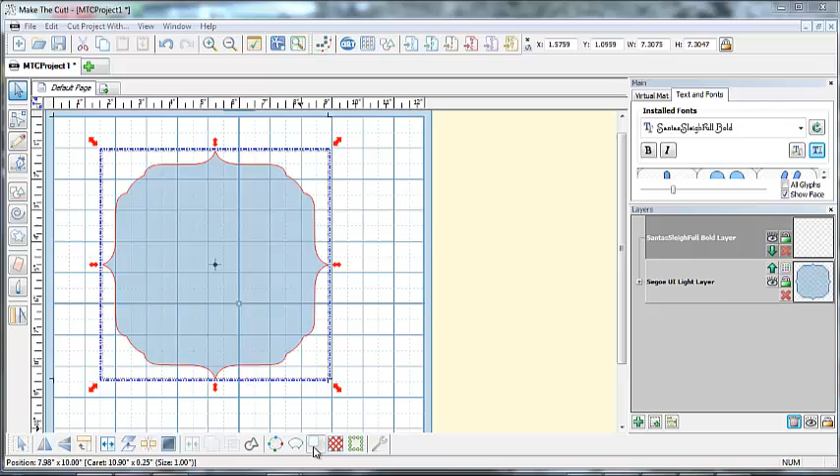So first off, we'll try a shadow with that. We'll try an inward shadow of -5, accept, just to see what an inward shadow of -5 would do for the little one. It doesn't look too bad, so we'll bring that in and do a +5 on the bigger one.

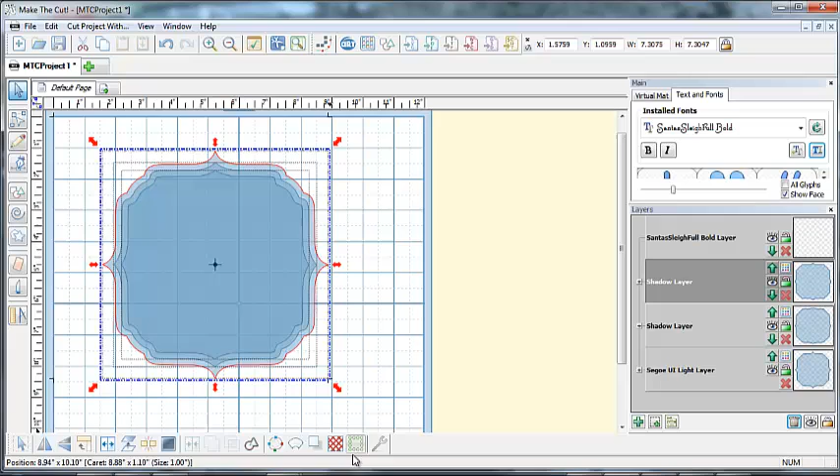You usually can work out which one's better to use for your project. As you'll see, I've now made 4. Accept. I think I don't like that last one, so I'll take that out.

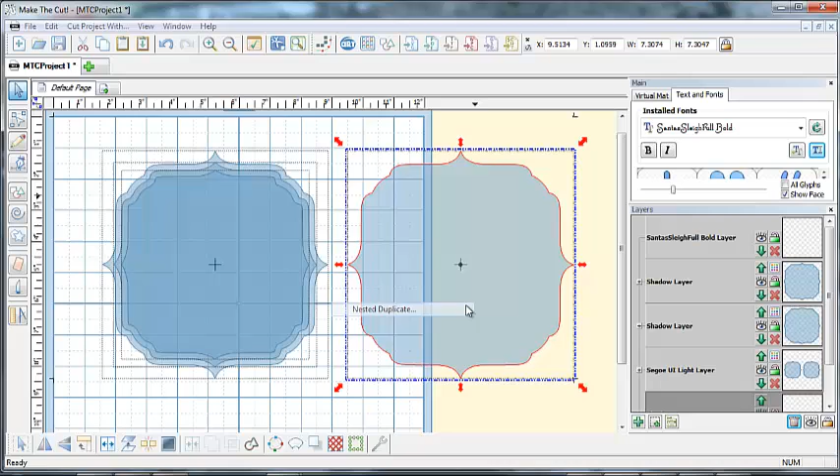We'll go cut. While I'm here, I'll just do a copy of this one, the bigger one, and do a nested duplicate to see how different that one would be. And we'll do 4 and preview that.

Oh, I don't mind the look of that. We'll take it up to, say, 5. Preview that, so it generates that. I don't mind that one better.

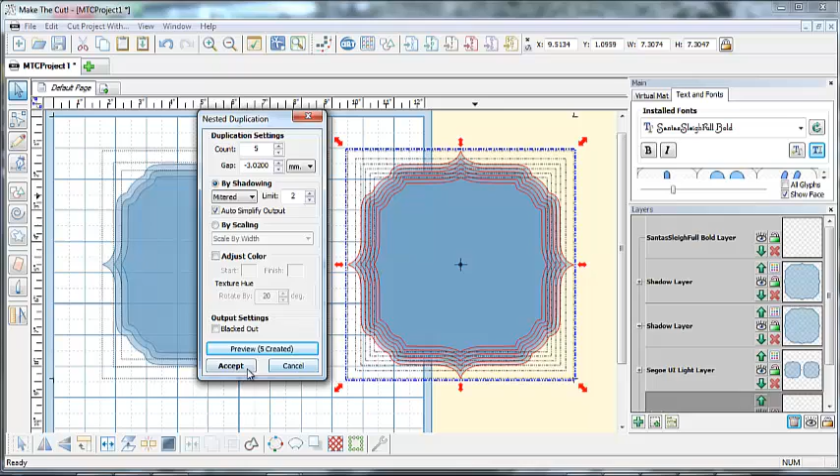Okay, we'll accept that. You'll see that the difference between this second one and this one is slightly different, or it might be just my eyes. So what I might do is throw away that one.

Cut. And use this one. This one, no, this one - and hold the shift key down and select the outer one. I'm going to do a copy of them.

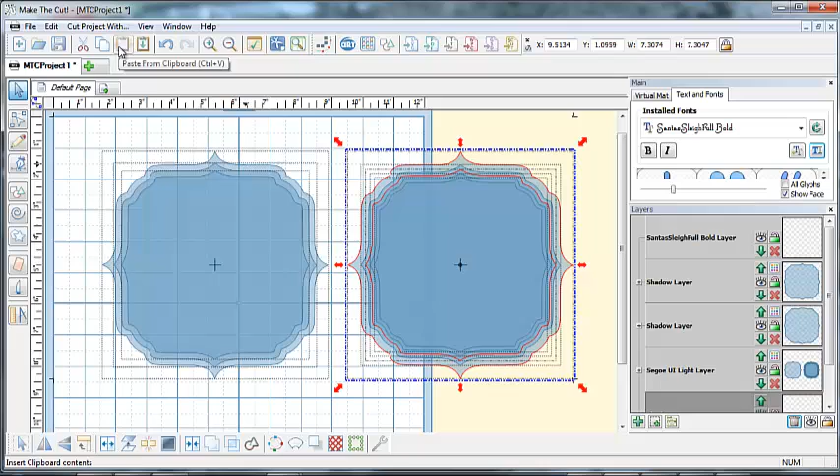Copy. Now I go over to Pop-Up Card Studio, and I've got a project. What I want to bring in is a project of 5 inches by 5 inches.

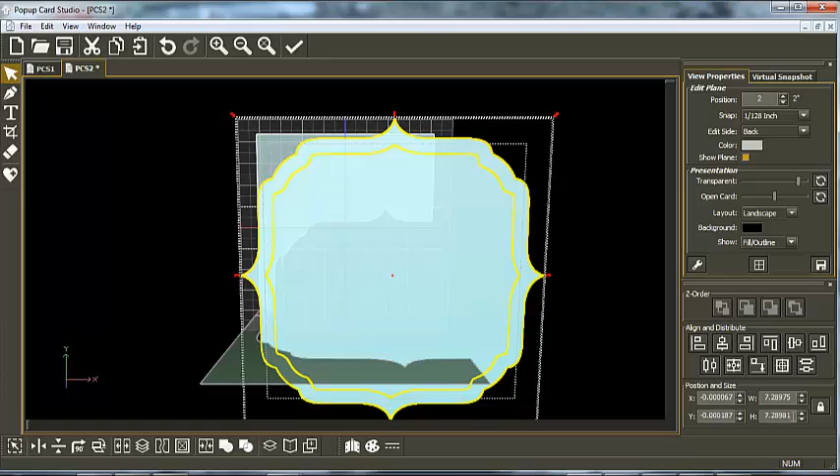Working the same way as I did my inside-outside cards, I bring this to a plane of 2. I go paste the project I just did, and I want that at 4 inches. So with the lock selected, I go 4 inches, enter, and I want that on a y-axis of 3.

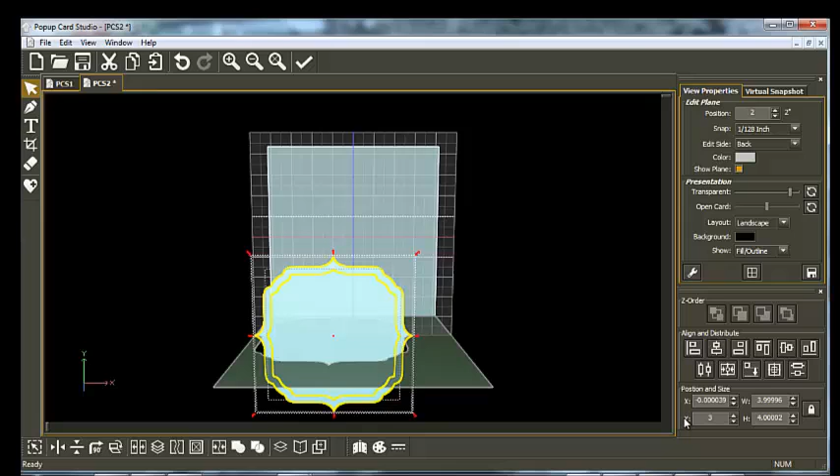And in the center, so I can go to the center there. So now what we have is the inside-outside card. I'm just thinking I might rotate that to make a different one again. Okay, we'll rotate that and see what it looks like.

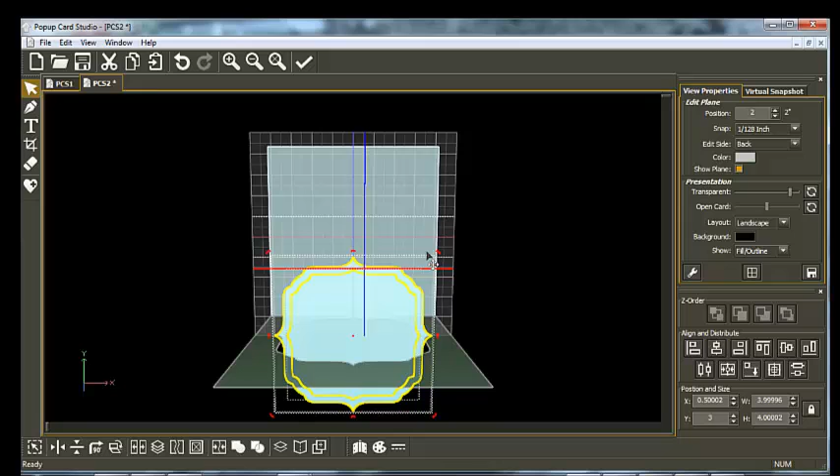Holding the control key down, I'm going to rotate it 45 degrees, and I'm going to see what that looks like. But I now want it back to 4 inches high. Oh, I do like that. So I just rotated it 45 degrees and I've got a different look again.

And I've got it back on the 3 axis and made it 4 inches high. So we shall continue an inside-outside card so it can be made into a pop-up display card.

And pop-up display cards are when you have one pop-up where it's folded here out, and this one gets connected to another bracket behind this line here and folded back there. I will just bring over this.

This is a folded display card, and we'll just show you. I did these in a webinar about a year or so ago. When did I do them? Back in 2012, 2 years ago.

And what you do is you have your pop-up inside-outside card here. You join another card here, but these two pop-ups, the inside-outside part, get joined with the tab at the back here, and it ends up being a display card like this.

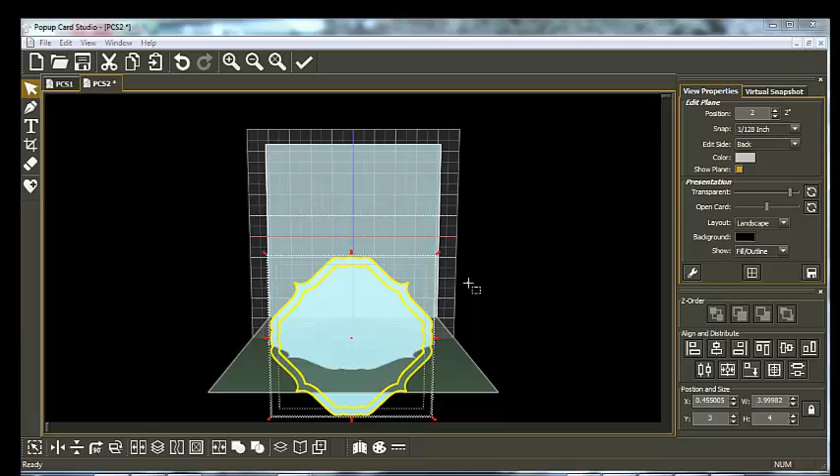So we'll continue. Now I'm doing this on the fly because I never thought I was going to use this bracket and do it like this with this shape. So we'll get back to here. I went off on a sidetrack there.

Now what I want to do is bring in a small 2-point rectangle about this width, and we'll put that in the center, and I want to put it on a plane of 3.

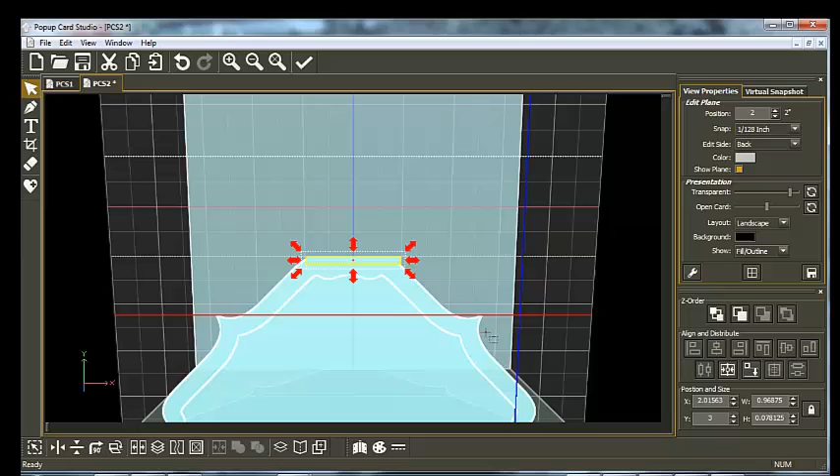I'm doing this for a reason. I've just sort of noticed, I don't think now my bracket is in the center.

It's not. So now I reselect that top little one I made and put that in the center, and a bracket and a y-axis of 3.

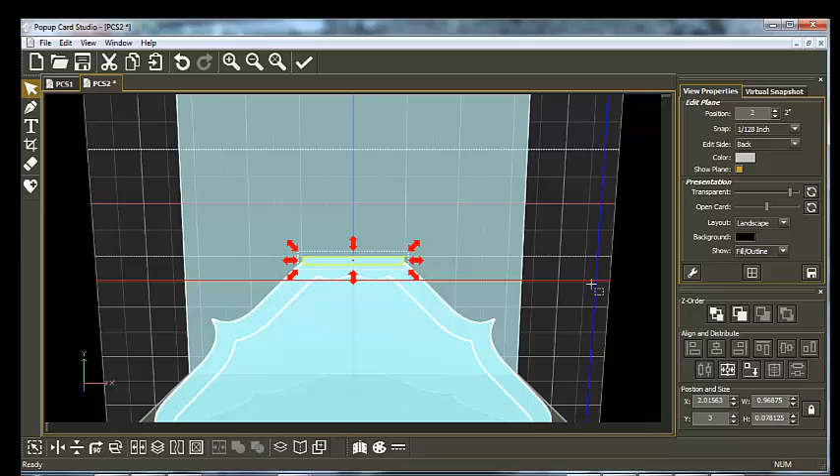So now what I'm doing, instead of chopping the top of the bracket, I'm adding a solid line onto it. So I'm going to fuse and weld these shortly. First off, I'm going to take a copy of them. Get copy.

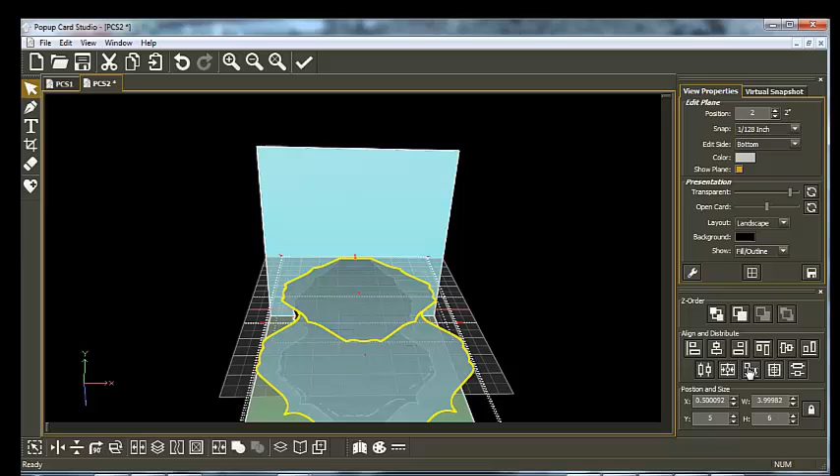Copy. And I go to the top plane. I go paste in place. Flip. And then I lower it down. Ooh! But it didn't lower. Right.

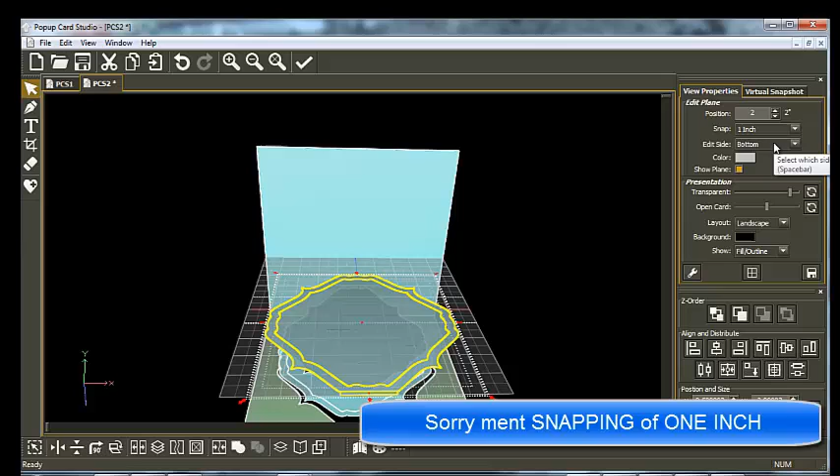What I'm going to do is turn this up to a snap of 1 inch, and I'm going to use the arrow keys to lower it, and hopefully, because I turned it on 1 inch, it's ended up on the 2-inch mark here, 3-inch mark here, and it has here. So this is now on a 3-inch plane.

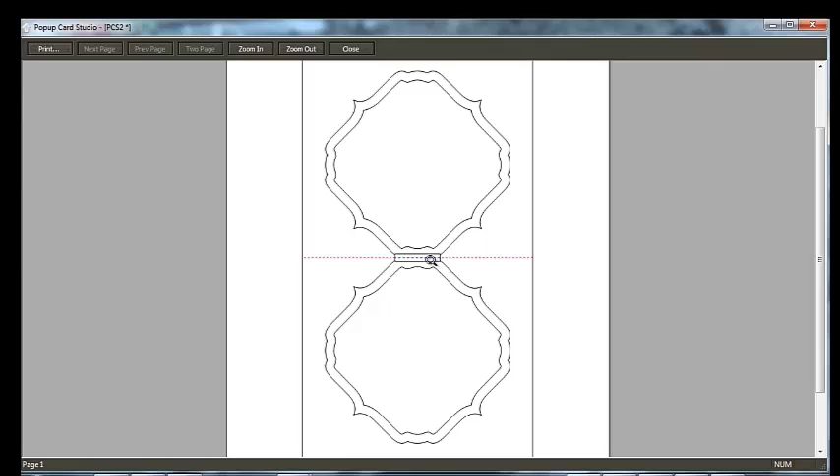So if I was to print preview this, the center of that block I made should be now dotted, and it is. So it's a score line.

Now that's one reason I did not weld them first. If I had to tweak it, I could weld it afterwards. So now what I do is deselect the inner one of these bracket shapes, and I do a weld.

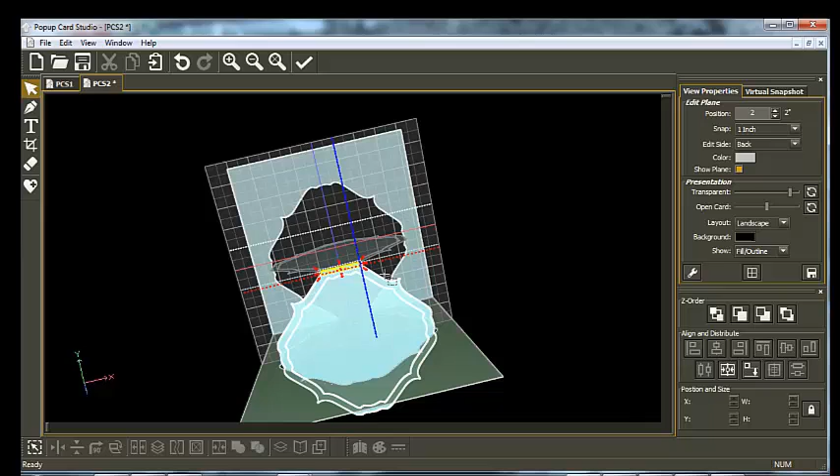I go back to this bottom one, holding the D key, going here, but I want to select that little one, and holding the shift key down, select the outer big one and do a weld of that.

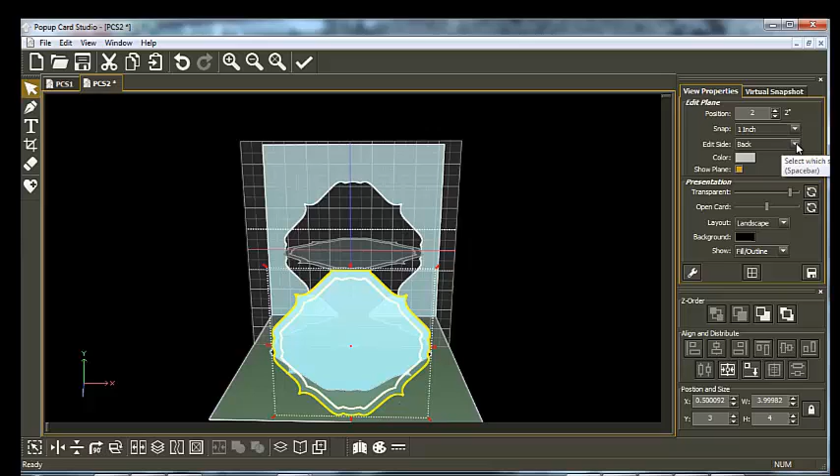Now what I do is I do a copy of that big one, copy, and I do a bottom plane of 0, and I do paste, and I lower that to the middle plane, and while I'm at it, I'll also lower it all the way down.

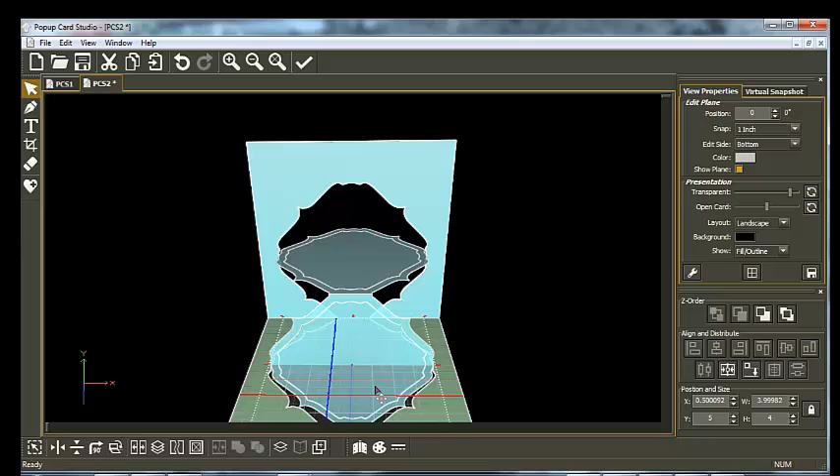So now that is now cutting out of the bottom of the card. But what we want is we want it to cut out. If I zoom this up here, whoops, and zoom it around.

What I want is I don't want this to be all the way back to the back. I'm going to come in, crop from the back, and I'm going to come, see how that's turned. Oh, I have to stop that for a second.

Well, right, we've lowered it to the bottom. I want to do a half inch. Now I do a crop, so I go from way back from the back. That's on where they both join, but now I want to come one more half inch forward and go chop.

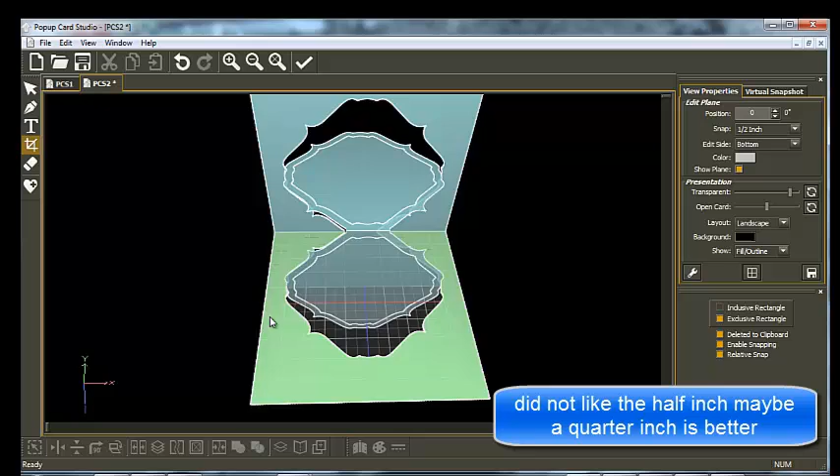So now what we have is that one that's on the bottom is only chopped, only going to have this half inch from that actual piece. There is a reason for this, but I'm going to go back because I'm not happy with that.

No, I'm going to make it a quarter inch from there. So I go here and one out and go crop. Okay, there is a reason for this, but now we're going to come back to that. So it's a quarter inch.

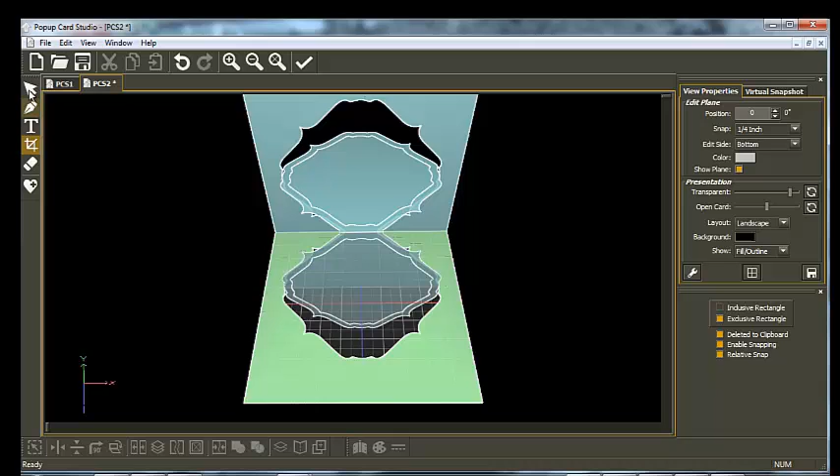This shape here is only a quarter inch back from the actual inside-outside card. Now hold the D key down and we go to this shape.

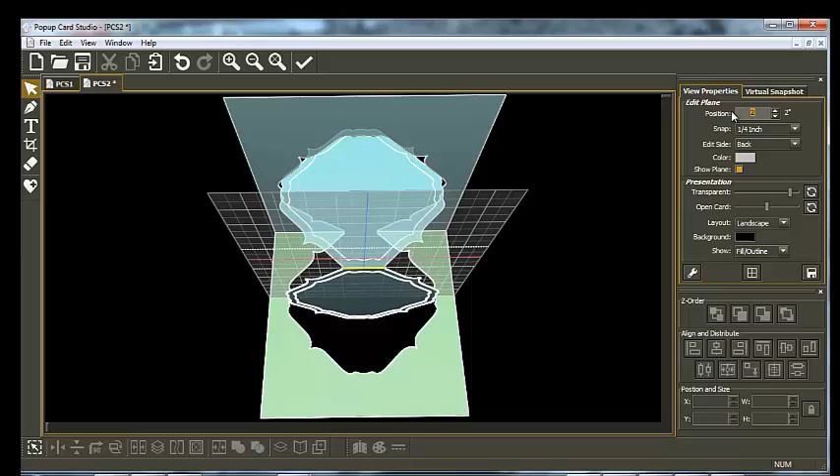We do a copy of that. We go to back plane of 0. And just pan up so we can see what we're doing. And we go paste. And we lower that to the lowermost plane. And then we lower it to the bottom, z-order.

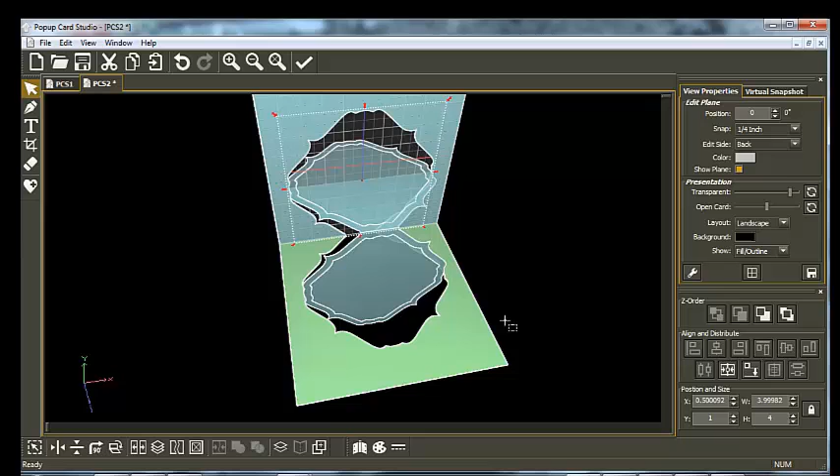Now we're going to crop that the same as we did the last one. We go from under it. And see how the dotted lines? We go one more up. So now we've just chopped this one.

So that is that big, from a quarter inch from this card. You'll understand what I'm doing shortly. Now we go back to this one.

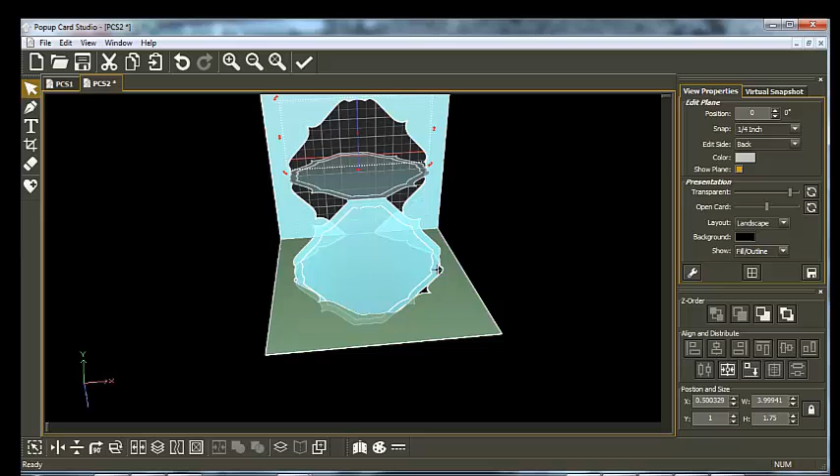We select this inner one and go cut to clipboard. Then we go to crop, and make sure deleted to clipboard is turned off, so it's no longer yellowed out.

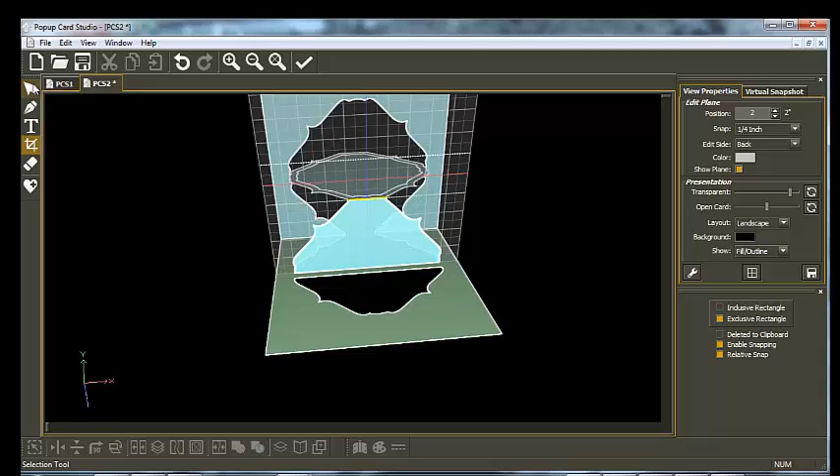We go from under here and up until the line turns dotted. Then we go back to the select tool and paste in place what we put in the clipboard. We select both and do a weld. Now we have our inside-outside card with one bit extra here.

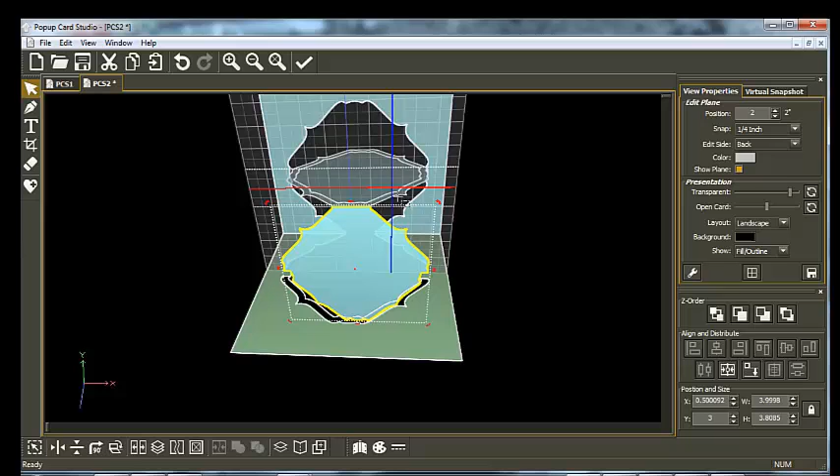And we're going to do the same with the top. Those who have watched my inside-outside pop-up card demonstration will have seen all this before. If you haven't, pop on after the video and have a look.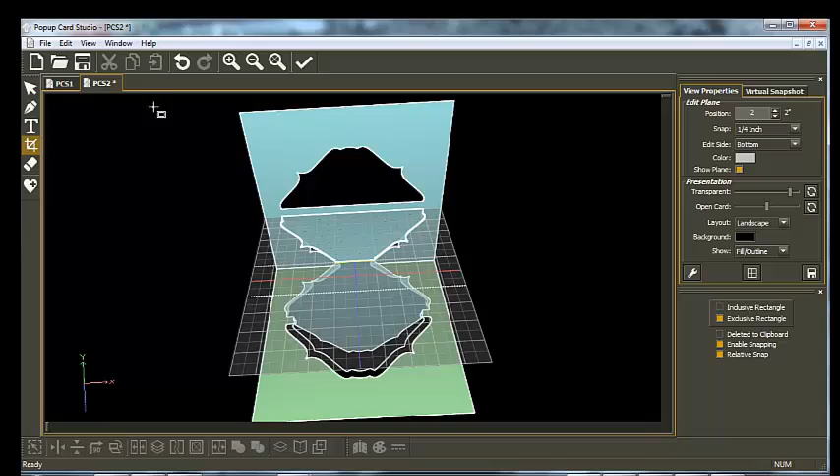You select the middle one, cut to clipboard. Bring the crop key, make sure it's not deleting to clipboard. Go from way behind up to when it turns dotted and clip. Then go back to the select tool, paste in place, select both, and do a weld.

Now we'll go to print preview. This is going to be folded backwards, the middle bit folded forwards, and it's going to be folded on these lines, so this back bit falls out. But you've also got this part here.

Now that part here, I can give you a tab so you can join to the next one along in your display card.

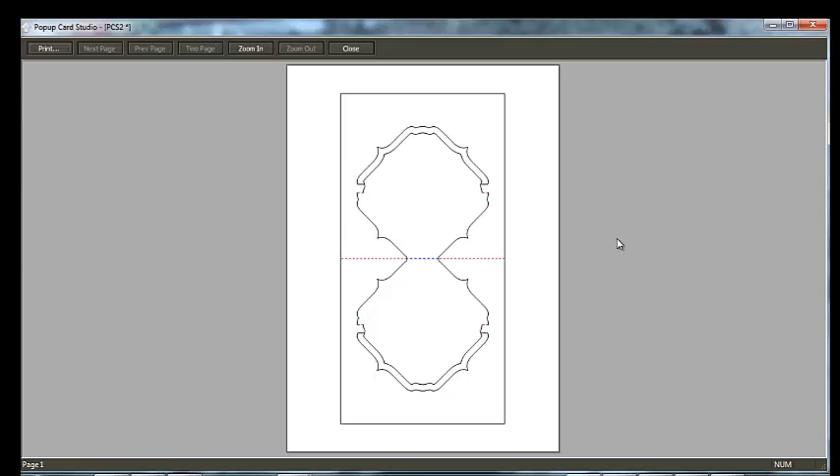So we stop that, and what we need to do now is go to an open card, and we'll pan that around and zoom in.

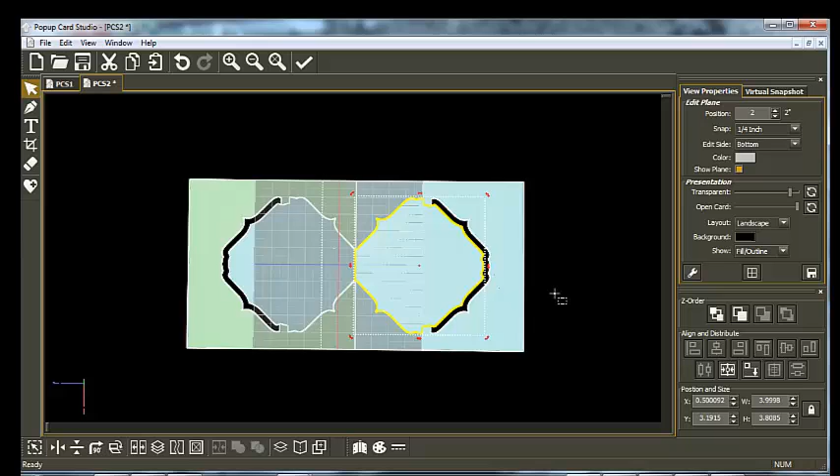Now what I need is, we're on this plane here, we need to add a little tab there so that when it's cut out and you join this card with another card, this will be at the front, this will be going through to the back, and the other one will be going through to the back. You join this tab up with the next one along behind this seam here.

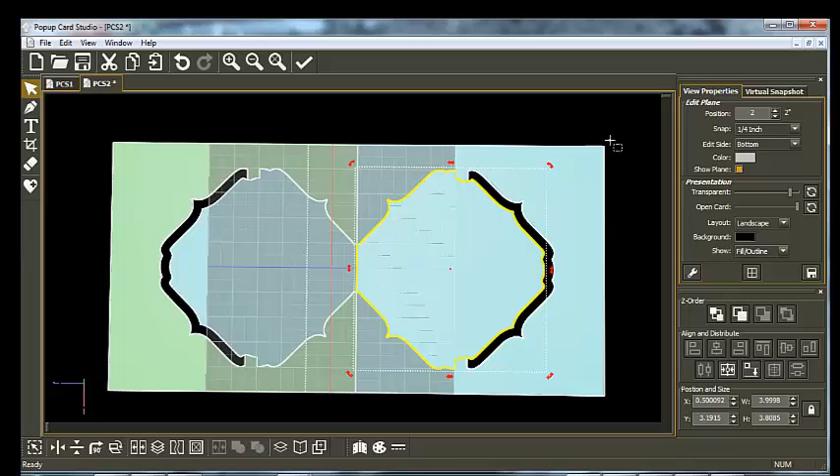So what we do is use the 2-point rectangle, and we take the snapping off because we don't want to go into the area we've just made, and we select that, put it in the center.

We do a copy of that because we know that's going to be the right size for the other end. So we do a copy, select both of them, and do a weld.

Then we hold the D key down, go to this one, do a paste, pick that up, move it down here, and put it in place.

Now bear in mind, depending on how many pages are in your cards in your display card, you might need to cut one or two of these off as you go. Then make sure that's in the center, hold the shift key down, select them both, and do a weld.

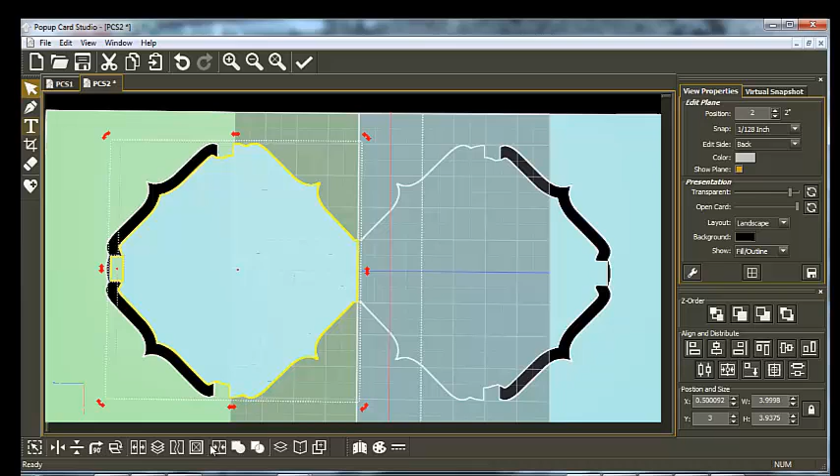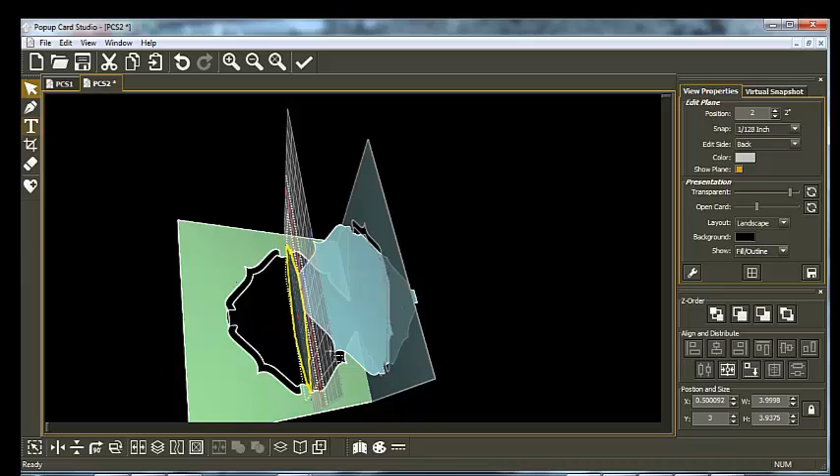So now what we have is your card, the inside-outside card, around, open and shut. When this is done, you'll have the next card joined to this seam here, and it'll be popping out here, and behind here we use this tab to join this pop-up with the pop-up from the other one behind this fold here. You just continue that along for as many as you like. So I hope this all makes sense.